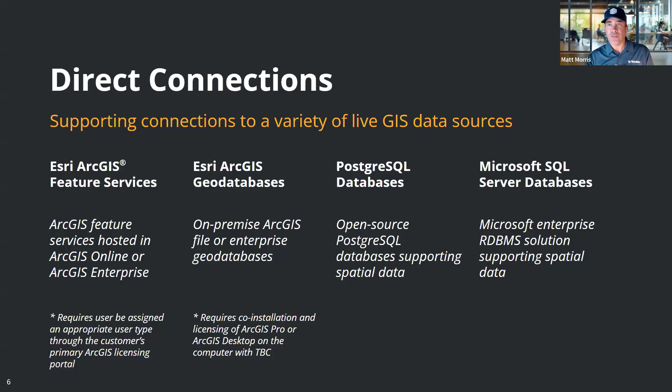Okay, it's no secret that a lot of people consider GIS a system of record, and a system of record that can enable and be shared with other enterprise systems in an organization. At the end of the day, GIS helps to bring together project and site-based data across space and time. A lot of times survey work is based on a site or a project, and what GIS is really good at is bringing that together from different time periods, from different spaces, being able to contextualize that with other spatial and non-spatial data. So you might have other environmental layers in your GIS, you might have political boundary layers, and all that can be contextualized in GIS along with your project-based survey data.

GIS enables use of a consistent authoritative schema for assets across survey and GIS workflows for optimal data quality. For example, in a water utility organization, you may want to say a hydrant has these properties that define a hydrant, right? And these rules. These properties are required, these properties are optional, these properties have to be one of these values, like a pick list. Well, I want to enforce that rule or that model for my asset across any workflow. So if I'm entering it in GIS, if I have someone doing an inspection out in the field, if I have someone as a surveyor out using Trimble Access, I want to use that same data model regardless of workflow.

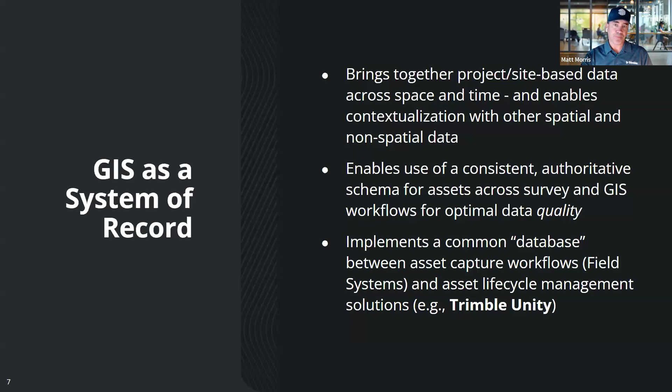Okay, getting into Esri ArcGIS specifically, which is in the title of the webinar. So I hope you came here expecting to hear something about Esri ArcGIS specifically. It's not the only GIS system of record, but arguably it's the biggest. TBC GIS supports the primary Esri ArcGIS data sources used by customers, geodatabases, and increasingly feature services.

For the last maybe 5+ years, it's become very clear in the Esri customer base that feature services are the preferred integration pattern for the modern Esri customer. They are supported at a core level across the ArcGIS platform. ArcGIS feature services can be hosted in either ArcGIS Online or ArcGIS Enterprise. So you may hear ArcGIS Enterprise referred to as Portal. Portal is the kind of cataloging discovery user experience on top of ArcGIS Enterprise.

And basically, if you're wondering, well, I'm not an Esri person, but what's the difference between ArcGIS Online and ArcGIS Enterprise? ArcGIS Online is a SaaS offering. You pay a subscription, or it's included in your Esri license, and you get access to it. It's hosted by Esri. ArcGIS Enterprise is most of that same functionality, but you host it yourself, either on-prem, in a private cloud environment, et cetera. So you bought the software, you license the software, and you're hosting it yourself.

Feature services expose GIS content to distributed clients through RESTful web services. This is a much more performant, scalable model than the old. Some of us who've been at Esri a long time used to connect to an ArcSDE database, right? An ArcSDE geodatabase. And if you try to do that over a VPN connection or over a wide area network, it was super slow because there was a lot of latency, very sensitive to latency. Well, feature services deal with all that because it's a RESTful web service. It's architected for that reason, scales much better, much more performant over all different sorts of network connections.

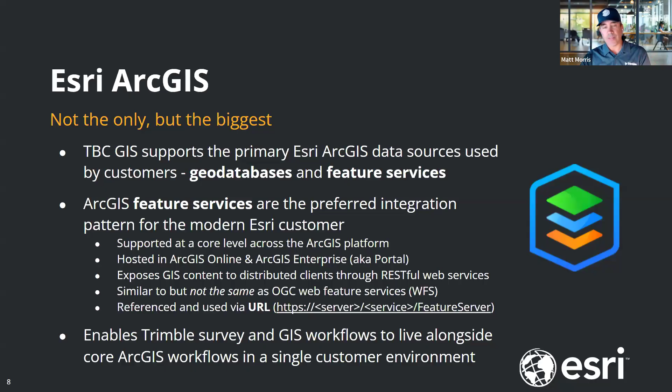Okay, let's talk in workflows. Before I talk about 3 specific workflows, I want to point out that all of these workflows in TBC GIS involve the same basic steps. On the GIS toolbar, you will use the GIS connection manager to create a connection to a GIS data set. And that's where you'll put in your feature service URL. To read existing GIS features into TBC, you will use the read features from GIS tool, right? So it's pretty self-explanatory. That pulls data in from GIS.

To write processed or extracted TBC features back into GIS, you use the write features to GIS tool. If you are writing features, maybe you've read features in, you've made changes, you want to write features back out, the existing features in GIS will be updated. We store those relationships. When you pull features in, we relate the feature in TBC to that ArcGIS feature, such that when you edit it and want to write the changes back out, we will update that feature in GIS and we will not duplicate it. Lastly, if at this phase of the work you want to create a new feature code library from GIS, you will use the Get GIS schema tool.

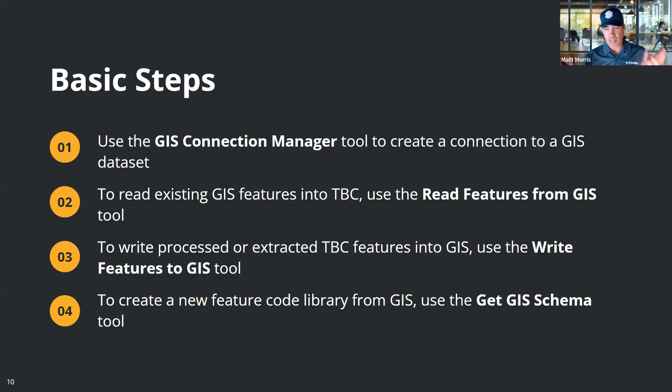And you'll see examples of this very shortly. Okay, three example workflows. I'm going to run through these demos first and then provide some more details afterwards.

I want to show you the end result, and then we can talk about how I got there. In each of these cases, I recorded these videos yesterday using the released version of TBC 2025.10. Most of this functionality, except for the last one, has been there for a couple of years, so it's nothing groundbreakingly new. I'm using the latest version of ArcGIS Pro, and services on the latest version of ArcGIS Online.

First example workflow is water utility GIS data, bringing it into TBC for design context. As a water utility, I have all of my layers in GIS, and I want to bring some of those infrastructure layers into TBC for context during a road design or other project, so I know what I'm starting with in a certain area. I may also want to bring those features in and send them out to the field in a job in Trimble Access because I need them staked where there's buried infrastructure. That's the use case for bringing water utility GIS data into TBC.

The second demo is a topo survey from TBC that I want to send to GIS for storing all my as-built. After I've completed building something, I'll go out and do a topo survey, collect that as-built, and send it into GIS, which I use to pull together all of my different sites and project work. This data was collected in Trimble Access, feature code processed, or baseline processed in TBC, and I'm going to send that into GIS as an as-built repository.

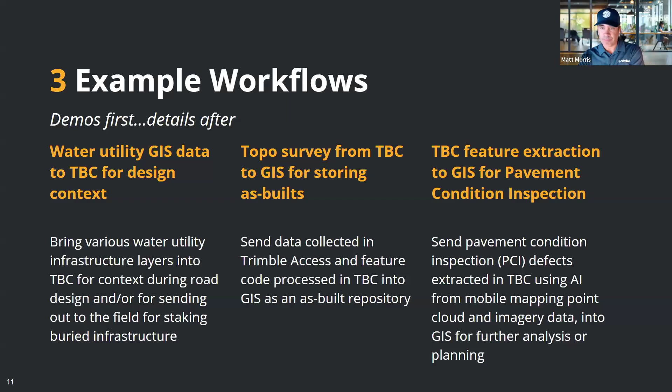Okay, first one, water utility data. Let's do this. Okay, hope that you can see my screen here.

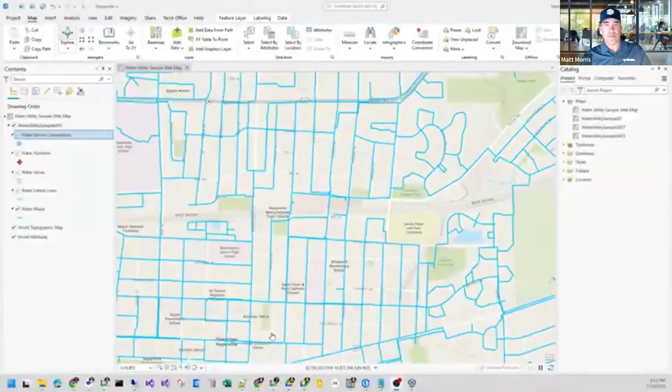So here I have my water utility data in ArcGIS Pro. This is something very common for a water utility, and I'm going to zoom in and see that this is the area I'm interested in. As I zoom in, layers turn on, I see some water mains, laterals, hydrants, shutoff valves, meters, service lines. This is the project area. I'm going to be doing some road work in this area, and I want to bring all this into TBC.

The first thing I'm going to do is go in and discover that feature service URL. In this case, I'm pulling this out of a property of the layer in ArcGIS Pro. There's my URL. I'm also looking at my coordinate system, verifying that this is Illinois State Plane NAD 83(2011), so I have the EPSG code 6455.

So I'm going to come over into TBC, and we're going to start a new project from scratch. I'm going to create that new project and do two things: first, define the coordinate system for the project, which is why I checked that in GIS. So here I'll search for that EPSG code 6455. I'll talk about coordinate systems a little bit more after these workflow demos.

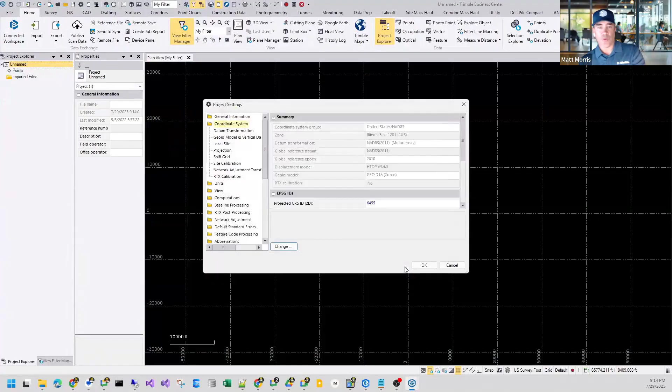The other thing I'm going to do is set my feature code library. Now, what I have done already is create a feature code library for this GIS data, and I'll talk specifically about how I did this. For this demo, you'll see that I've already created that. So now I have a new project.

I have my coordinate system and my feature code library already created and symbolized. Now I'm going to zoom into the area where I want to bring that data in, and use the functionality in TBC to limit what I bring in. So I'll go specifically to the area of Naperville, Illinois, where my utility is, and start using the GIS module to get that data in.

I did specify geoid 18, maybe I didn't show it, but I clicked through that relatively quickly. So this is Illinois State Plane NAD 83-2011, using geoid 18 for orthometric heights.

So here's that same area. I've turned on my base map from Trimble Maps just to see that same context, to know where I'm looking. So I'm going to go to the GIS connection, pick Esri service, and paste in my URL.

And here, as I mentioned, I'm prompted for my ArcGIS authentication. My login gives me the ability, if I knew how to type my password, to read and write to these data sources. So I'm going to go ahead and connect to that.

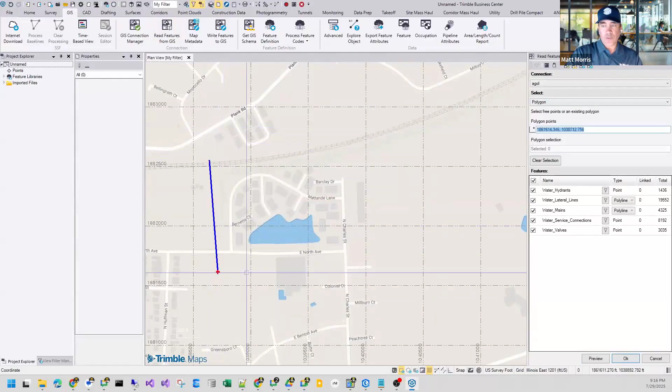So here I see a summary of the data available to me, and that's a lot of features in that total column. But what I'm going to do is only bring in the features within this polygon, because that's all I'm interested in. So I'll click OK.

This is going to apply that spatial filter when reading data from these feature services across those 5 layers: hydrants, lateral lines, mains, service connections, and valves. If I tried reading in the whole thing, TBC feature services have a limit on what you can read in one shot, so I wouldn't be able to bring all that in one go. But in this case, since I'm only interested in a specific area, it works pretty well.

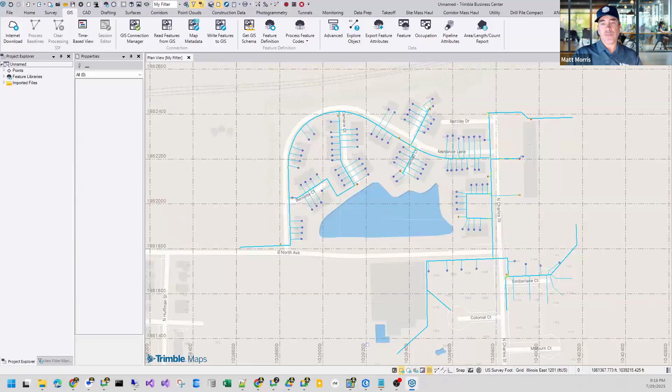So here I have 421 features that came in. Like I said, I've already symbolized them through my feature code library to look something like they do in GIS. Symbology is something that doesn't come out of the box—you're kind of on your own with symbology to try to make GIS and more CAD style symbology match.

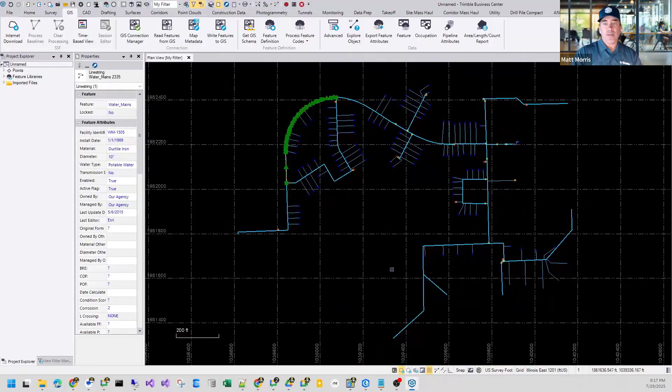And here I see not only my geometries, but all of my attribution as it existed in GIS. So now I have this available to me contextually for the work I'm going to do on this design project. And like I said, I can send it out to the field in an Access job if I want to go have something staked out in the field.

Okay, workflow 2. In this case, we talked about a topographical survey that I did, say, in Trimble Access. I went out and collected a bunch of features with the feature code library that I authored in Trimble, and I want to then send that into GIS. As I complete an as-built survey of a site, I want to be able to send that into GIS, and then I want my GIS users to have access to that data for all of the sites that I've surveyed. So let's go ahead and start there.

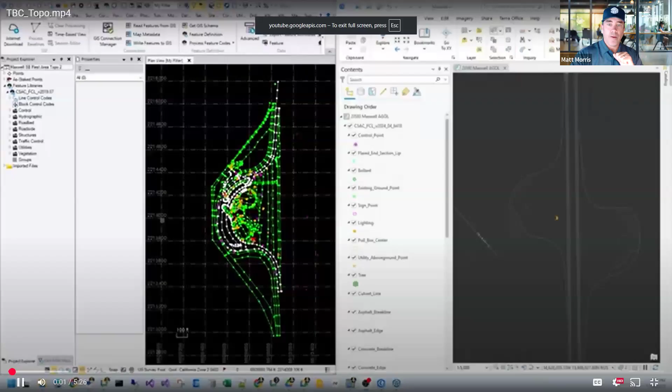So what you see here, it's a little blurry at first, but it'll click in. I have on the left a project in TBC, and on the right an empty screen in ArcGIS Pro, which is a feature service. I'm just showing that, hey, no data exists yet for this location. This happens to be a rest stop, and I'm going to do the same thing. This ArcGIS Pro project is already referencing that feature service.

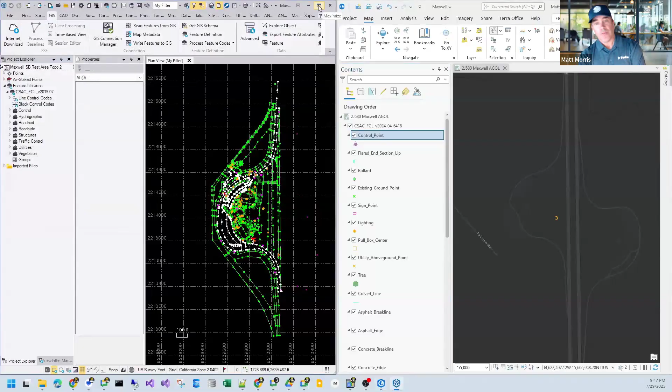So I'm going to, same as before, get that URL because that's what I need in TBC. I'm also going to validate the coordinate system—this is another NAD 83-2011 state plane, California Zone 2 up in Northern California. So here I have a fairly traditional TBC project, with a fairly comprehensive feature code library authored in Trimble tools using Feature Definition Manager. And I can click on things.

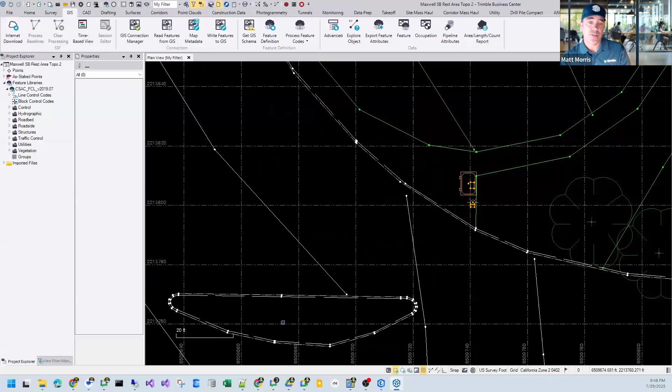That's a tree. I see some attributes and properties of the tree there on the left in the TBC properties window. I have a fairly traditional topographic survey with control points. Again, not heavy attribution, but attribution nonetheless, and the ability to attach photos and files as media elements based on my feature code library.

So remember those steps. First step, create a new connection. I'll give it a name, pick the data source type, Esri service, and connect. I'll paste in that URL that I discovered earlier through ArcGIS Pro, and again I'm prompted for my login. I should mention that in this particular demo, I'm getting that feature service URL out of ArcGIS Pro.

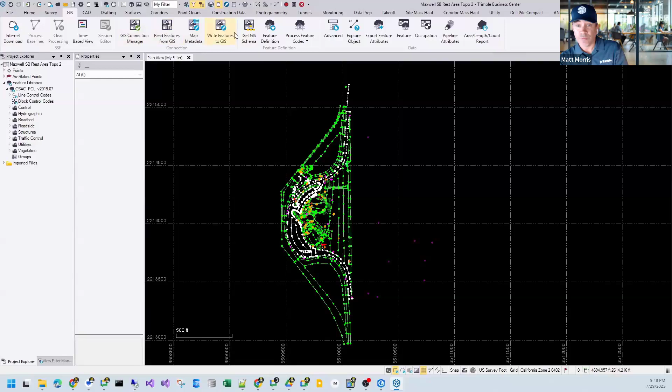In a later demo, I'll show you I can also get that through an ArcGIS Online web environment or through the web user interface. It doesn't have to be ArcGIS Pro.

So here, when I connect, now what I'm doing is I'm going to write features to GIS. You see here on the right, these are all of the layers in my GIS connection that I can write data to, and it's already been mapped to my feature code library. So all I'm doing here is selecting all the features, and I see the counts in that new column saying these are all new features that I'm going to write into this GIS data source.

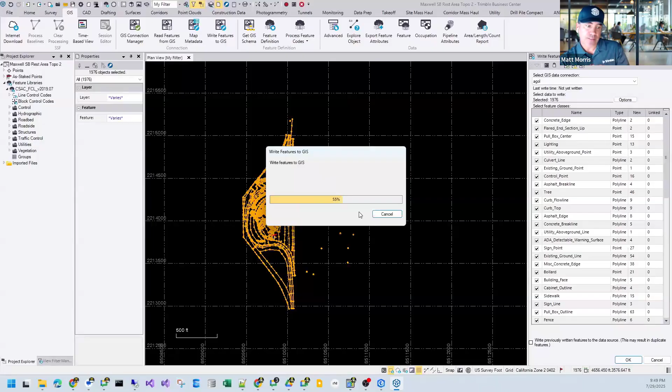Now, I want to point out that the number you see at the top, that selected data to write, says 1976. That includes all of the individual points that make up lines, and that is not data that will get sent over to GIS. From a line and polygon standpoint, what ends up in GIS is the finished geometry. Although what we retain in TBC are those constructions, all those individual points that make up the line, make up the polygon, what gets sent to GIS are points and the finished lines and finished polygons.

So you'll see in this report when it's done, that resulted in 374 features being sent to GIS.

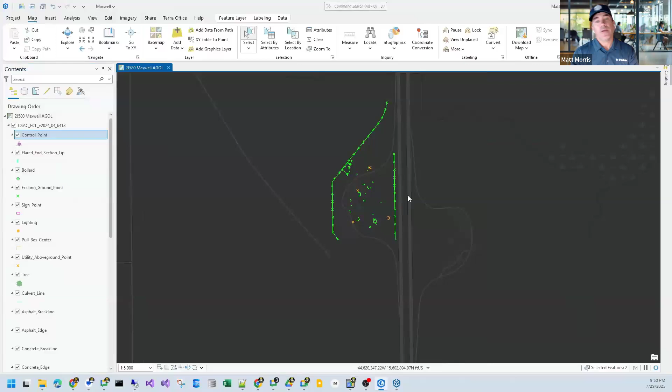So now let's flip over to ArcGIS Pro, back where it's referencing that feature service. I'm going to refresh it, and I'll see that there is that data now in ArcGIS Pro. I'm using ArcGIS Pro to look at a feature service, and I've already defined my symbology to match roughly what exists in TBC. And I can click on a feature and view properties.

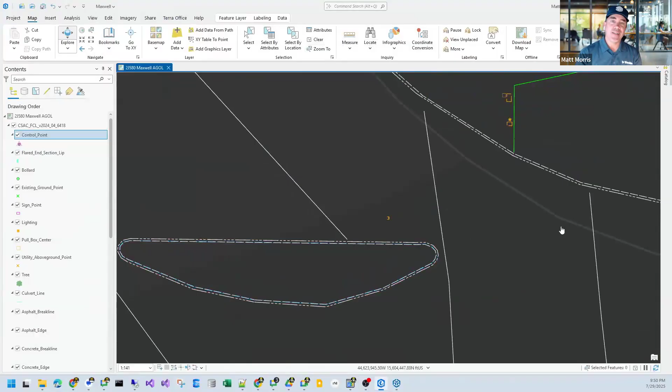In this case, I happen to select a feature instead, so I'm going to get a property here of a base layer that is irrelevant - district tiger lines is completely separate. But when I clear that selection and then click on, for example, one of the trees I clicked on earlier, there's the properties of that tree.

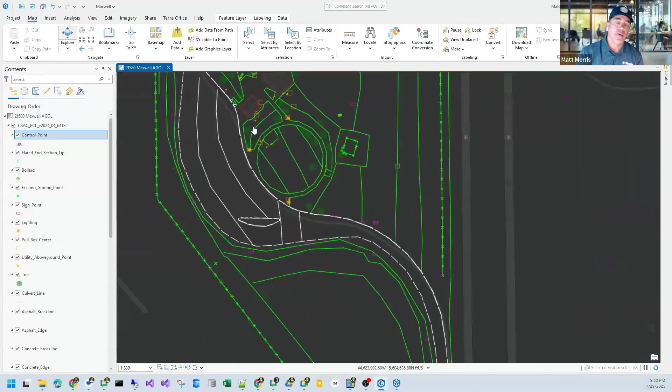And this is now a two-way connection to this data. If I edit an attribute of this in GIS, I can read those changes back in TBC. If someone put in that tree information wrong, or someone in GIS wants to provide additional attribution, I can read that back in TBC to my existing project and the existing feature. Here's a sign, traffic control, regulatory sign made out of metal. So there's my data sitting in that feature service.

Well, what does that look like through a web browser, right? Because a lot of GIS users, if they're using ArcGIS, are going to be accessing this content through a web browser. So here I'm logged into ArcGIS Online. I'm looking at my content, and I want to go down and only look at web maps. A web map basically references layers, references feature services.

So here I have that same feature service that I was using in ArcGIS Pro. Now I'm referencing it in a pure web-based web map. And here I can contextualize it with my district boundaries, with my state plane zone boundaries. This could be a project index where I could say this is my starting point for looking at my survey data across a bunch of different projects.

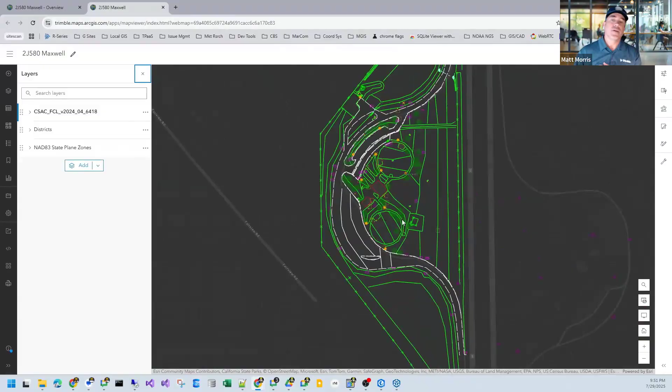So sure enough, I can zoom in, see the exact same content rendered the same way cartographically, and I can still click on things and get a pop-up to say what that feature is. Same functionality, I'm just showing it here in the browser. And this is kind of the power of GIS, being able to spread this, provide access to this data across a lot of different clients - mobile clients, web clients, desktop clients, etc.

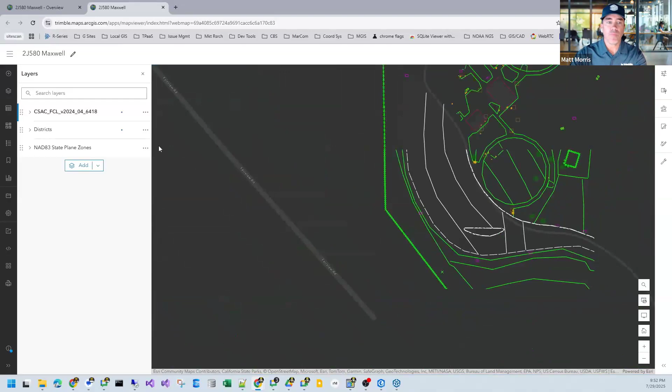You also have the ability, obviously, to set bookmarks, things like that. So I can go back to that context of my districts and zones.

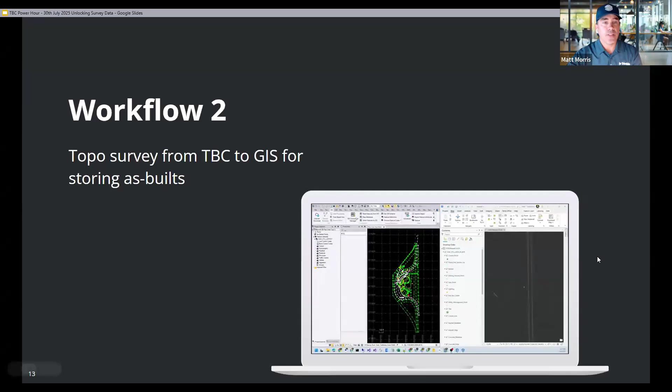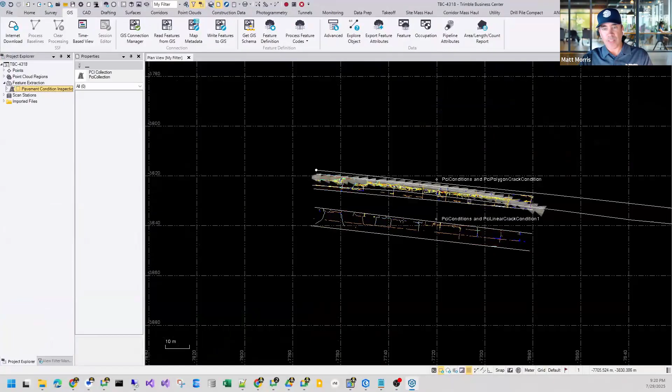The constraint is you have to have a known schema in the GIS that matches this PCI. And there are some ways you can manage that if there are some differences in naming. But I can click on these. I've extracted alligator cracking. Here's one that's rutting, high severity. So all this comes out of that pavement condition inspection work in TBC.

So now I have this data, and I want to bring this data into GIS because I want to contextualize it with maybe some other layers: is this near open space? Is this near other environmental concerns? Is there anything around the work planning I need to be aware of for repairing these defects?

So I'm going to do this through a web browser exclusively. I'm going to look for my layers that I've already created to store this data. So here I'm looking for feature layers, using the filtering tools in the environment to find the layer I'm looking for. Here's the layer I've created with the appropriate schema, and I will discover the URL from here. There is that feature service URL that I need in TBC.

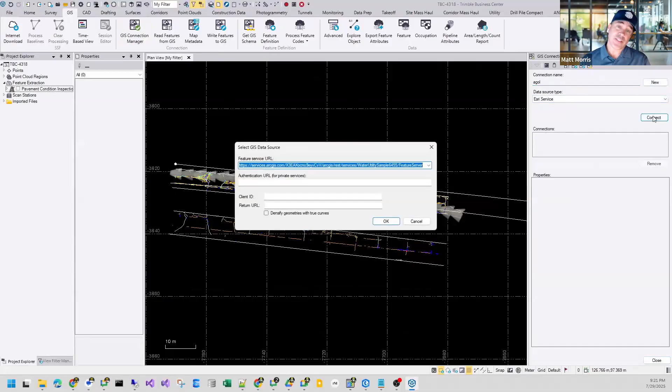So let's come back to TBC. We know what we need to connect to. We know where we want to send this data. Create a new connection. ArcGIS Online, call it AGOL, call it anything you want. I should point out that a TBC project can have multiple connections. If you want to bring in other layers from other GIS data sources, you can do that.

Now, what's interesting here is when I connect to this data source, it's saying, hey, I can't resolve these two coordinate system differences. What do you want me to do? And you get the choices of change the project coordinate system to match GIS, keep them but perform a transformation between the two, or consider them to be the same. You also get specific control over what type of elevations are coming in from the GIS, orthometric or ellipsoidal.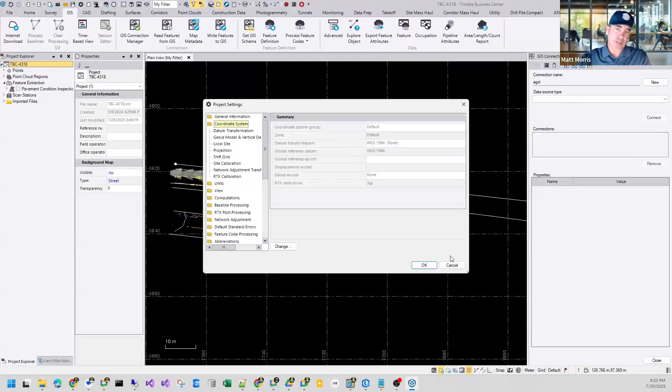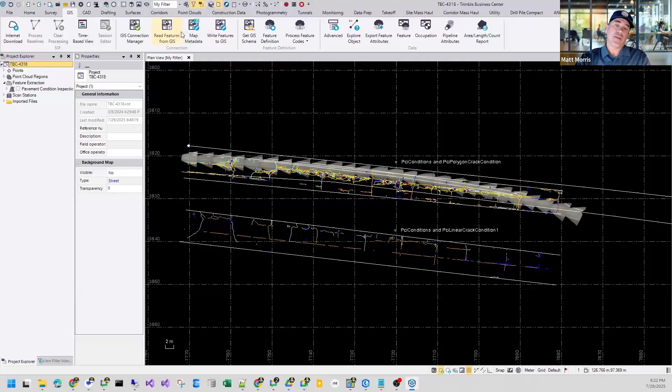So let's go back. I'm going to cancel that. Let's go look at this project and see why this is the case. Well, sure enough, here's what it is. This project in TBC was created in WGS 84 for whatever reason. So what we need to do is select that middle radio button that says transform grid coordinates when reading and writing features to and from GIS, to navigate between a WGS 84 project in TBC and a zone or projected coordinate system in GIS.

So now I have my connection. I'm going to select all the features that I want, and I see them selected here in those 5 layers. And I use write features to GIS. Selected all the features, and I'm going to send those over. So now all that pavement condition data that was extracted, the condition scores, all those individual defects have been sent to GIS.

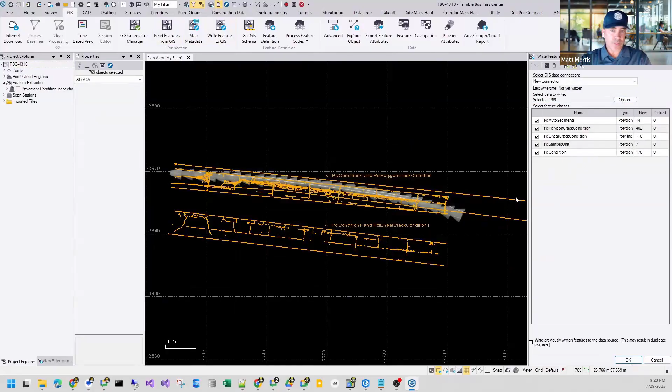I'm not showing here that after every write operation, we give you the ability to look at a report. So you can see successes, failures, etc., to give some more information about what just happened and if it worked the way you expected it to.

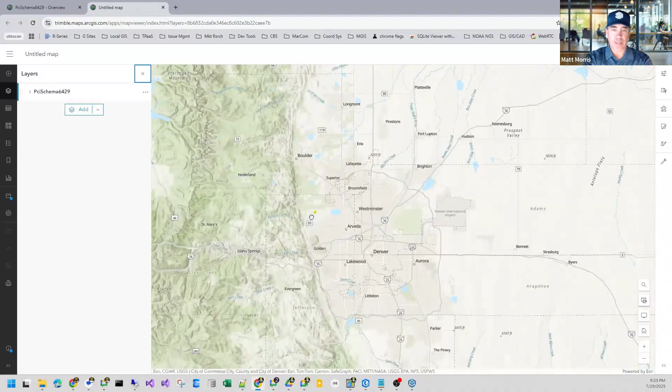So I'm going to go back to my ArcGIS Online user experience, and I'm going to add that layer to a new map. What I've done here is I have just opened up that layer in a new map. This is just the default map, and I can zoom in and see that feature service data layered on a default base map.

And so, okay, I'm part of the way there now. But what I want to do is, first of all, look and make sure that I have all my, so what I did ahead of time is I set up all the symbology here to match TBC.

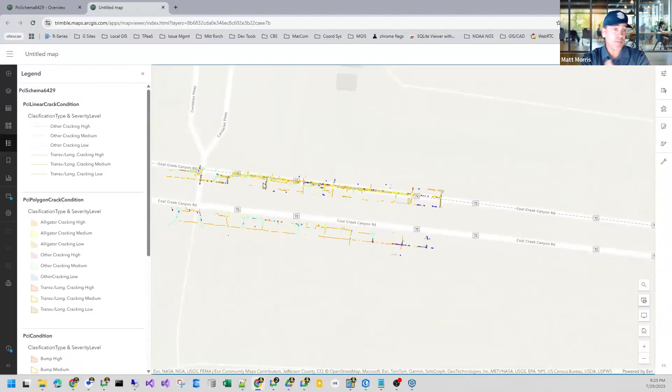Again, symbology is kind of manual, you've got to do that yourself. It's not included, not really supported. We don't set symbology automatically. I'm going to change the background map here to maybe make it easier to visualize over an aerial photo.

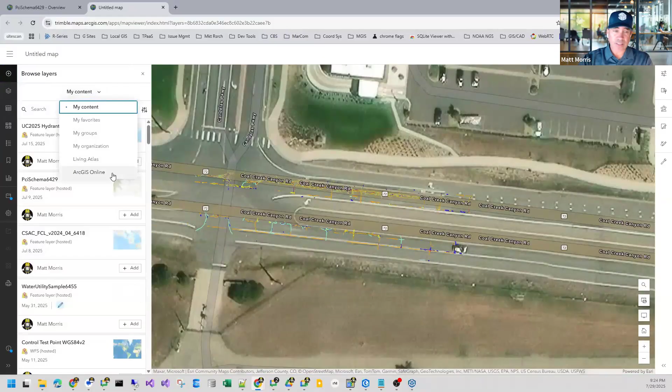And what I talked about with GIS is I want to contextualize this data. So I know that there are layers available in ArcGIS Online that are public, or in Esri's Living Atlas, that might help me contextualize this data. So the first thing I'm going to do is look for a Jefferson County open space layer, what's defined as open space land, so I can add that layer.

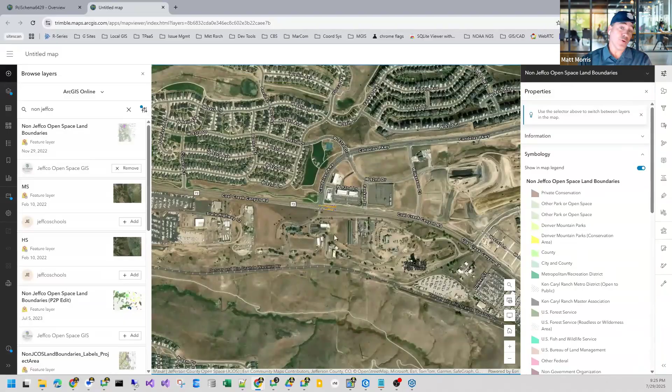So I know I have open space designated land around here. Let's add a layer and see if this project site is anywhere near that. And I say, okay, it's not immediately adjacent, but it is within range; there are open spaces around it, which might inform how I need to perform this from an environmental sensitivity standpoint.

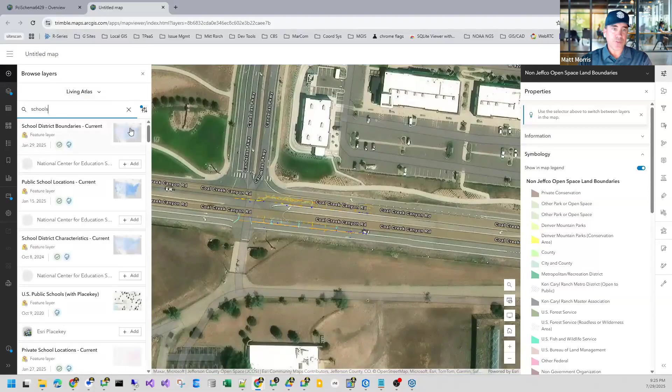Additionally, in this aerial photo I see things that look like schools. When I'm doing work in this area, do I need to be concerned about schools? So here I'm going to go over to the Living Atlas and just search for schools. You saw earlier that I had already picked a filter for results in the map area. So I just added a layer for public schools, and sure enough, there is a school here.

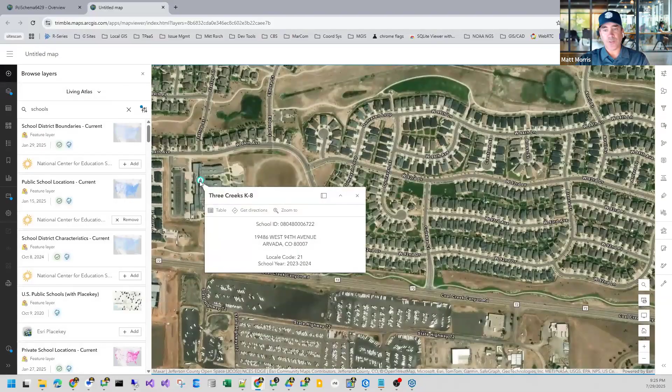And I can click on it and get more information about it and see that it is a K-8 school. Maybe this will inform when I can do this work, because K-8 schools typically are out during the summer, so less traffic on the road, easier to do repairs on the road.

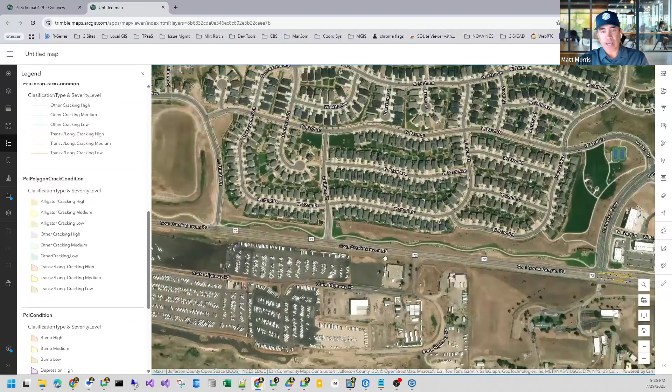At any time, I can go look at map symbology and see all these layers that I've added, not just my pavement condition inspection that I pushed from TBC with all of its detail, but also all these other layers that I added for context. If I want to keep changing base maps, there are a lot of other base map options available in the context of GIS to help me visualize this data.

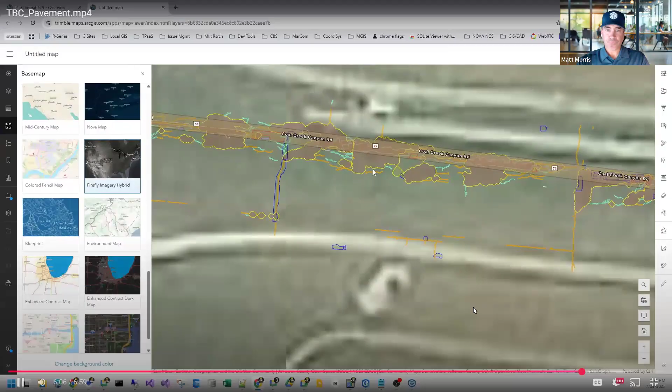Okay, so those are the 3 workflows. And in those workflows, you see that I already had some things set up, right? Some of that is just to make sure the demos flow clearly. But now I want to talk specifically about those key configuration items and how you get to those workflows. There are 2 big things: schema and coordinate systems. The best practice is to make sure that these match between TBC and GIS.

On the TBC side, a schema is defined through a feature library that controls attribution and symbology for each feature type. In TBC, a feature is a point, line, or polygon that has been assigned a feature type from a feature library. GIS is all about schemas, right? Each layer defines the schema: the types of attributes, the data types, the rules, whether it's required, min and max values, choice lists, things like that.

The GIS module translates between a GIS schema and a TBC schema. But what it doesn't allow you to do is map between disparate schemas, right? So you need to have those set to match. And I'll talk about that on the next slide.

Additionally, coordinate systems. You saw me do this in the demos where I was validating that coordinate systems were the same. In TBC, the project coordinate system defines the spatial reference and includes a horizontal component and a vertical component, the horizontal being zone, datum, and transformation, the vertical being the geoid. Esri also has its coordinate system definition. You do have some ability to navigate between differences in coordinate systems, as we saw in that last demo, but where possible, you want these to be the same.

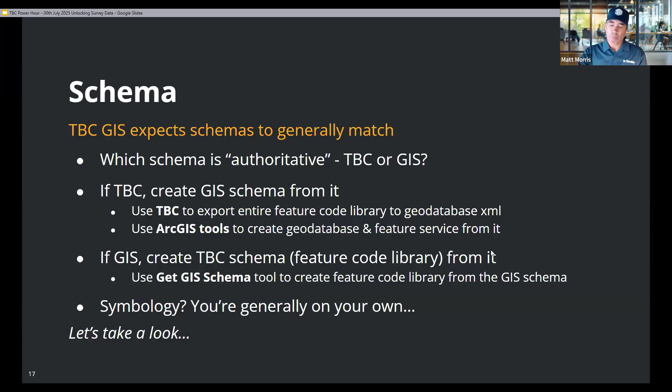So in this video, I showed two things. The first thing I'm going to start with is I have an authoritative schema in TBC. For this demo, I'm actually using the global features feature code library that ships with TBC. So I've created a simple project in the coordinate system 6424, which is my local California state plane zone.

And I see that here are my feature types in that global features FXL that ships with TBC. I can use this in Trimble Access, whatever. And I can go in here, I can look at it and say, yes, this is my authoritative schema. I've defined it using Trimble tools, and I want to bring that schema into GIS such that I can connect to it. And now I can send data from TBC to GIS and the schemas match.

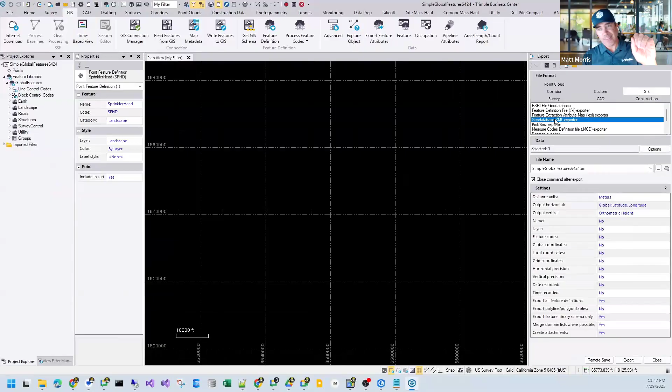So how do I do that? Well, I go over to the traditional export, right? We talked about there's still use cases for this. I will pick the GIS format, I'll pick the geodatabase XML exporter, and then I'll specify these specific options at the bottom. Export all feature definitions, export feature library schema only, merge domain lists where possible, and create attachments.

Now, what create attachments is, is if you have feature types with attributes that let you store files. So that could be a file or photo attribute type. What this means is that when we export this geodatabase XML file, which is a definition of an ArcGIS schema, we will enable those layers for attachments because we want you to be able to store those files that maybe you've associated with features or captured in the field in Access or added to the features in TBC. We want to be able to pull those files into the GIS as well, pictures, PDFs, etc.

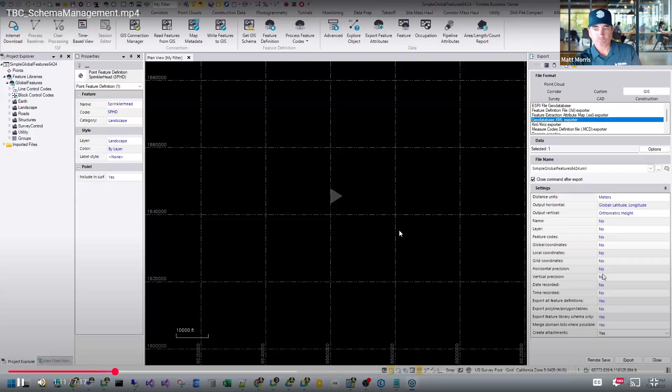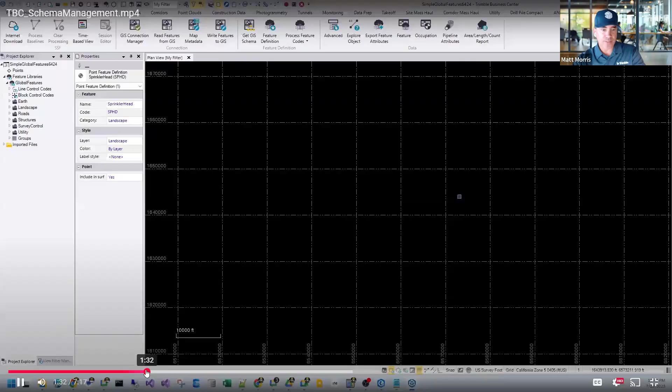Okay, so now I'm going to export this and it's going to go to this geodatabase XML file. So this functionality is not new. What is new here in the last couple of versions is the ability to export all feature definitions and no data, right? I just want the feature definitions. I don't want the data. I just want the schema. Okay, so that's what I just did. I exported just that schema. I didn't want any data, just a schema, and I want every layer in my feature code library.

Now I'm going to flip over to ArcGIS, and this is a default empty ArcGIS Pro project. I'm going to create a new file geodatabase, just an empty geodatabase. This is the process you need to use, and I'm going to call it global features WGS84. The reason I'm calling it WGS84 will be clear to you in a minute. So this is just an empty file geodatabase, and I'm going to import that geodatabase XML file that I just exported in TBC.

So I picked that one. There's that XML file, again, based on that Trimble global feature code library. And I see that here's all the layers, the feature classes, and the attachment classes. The reason the item count jumped here to 225 is because when you enable feature classes for attachments, it adds multiple other data structures in the geodatabase. That's why it's 225 instead of the 112 that we saw over in TBC when we exported that feature code library.

Okay, so what this is doing is this is building out the geodatabase schema. This is the process you need to use to do it. So now I have an empty geodatabase with all that data. Now, when I go look at the properties of these layers, I will see that they are WGS84. But I don't want my GIS data set up in WGS84. I want it set up in a local coordinate system, a projected coordinate system.

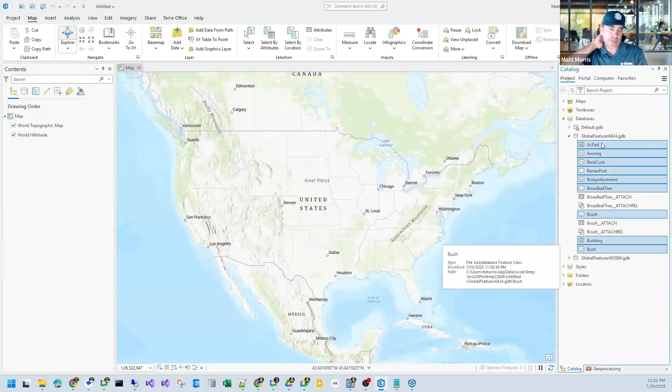And we're talking about feature services. So I want to publish this to a feature service such that I then can connect to it from TBC. Now, if all I cared about was the geodatabase, I already have it. But it is the first step. It's a prerequisite towards creating a feature service in a specific coordinate system in this workflow.

So I've added those layers to a new map. I'm going to go in here and see that my map projected correctly to my local state plane zone. I see the orientation. I will check it just to make sure that my coordinate systems are set correctly in my map. Yes, there's my XY and there's my transformation. The reason the transformation is there is for the base map. Esri base maps are always WGS84 Web Mercator.

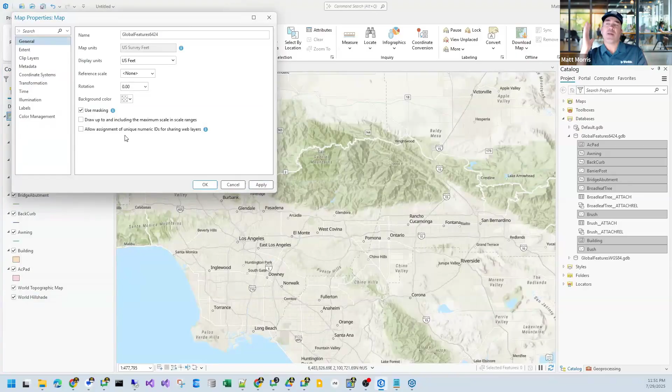So now I'm going to give this map a name. This name will form the basis for my feature service name. So this is all Esri functionality, right? But I'm just wanting to show you the end-to-end workflow from how to get TBC schema to GIS schema, and GIS schema back usable in TBC.

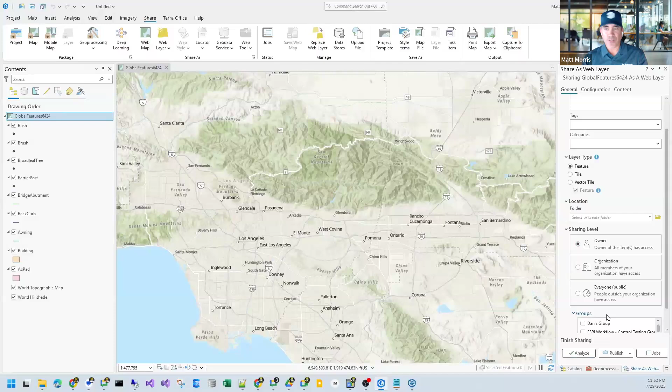So what I'm doing now is I'm using ArcGIS Pro's sharing functionality to share this map as a feature service. So this is what this looks like. It's called sharing it as a web layer. Layer type is feature. This is the workflow I would use to do it. So I started with a geodatabase XML, brought that into a geodatabase, published it as a feature service that then I can use in TBC.

So let's go back, flip gears. What if my Esri schema, my ArcGIS schema, is authoritative? So let's go back to this example earlier of this water utility. This was a water utility data model authored in Esri originally, and I want to create a feature code library from this. You saw I already had this. When I did this demo, I already had a feature code library. So how did I create that feature code library?

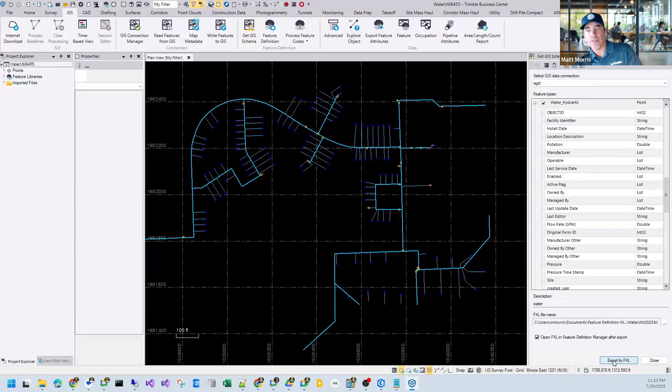Well, let's go back to this project where I have a connection to this feature service. Here, I'm going to use the Get GIS Schema tool. And here I see it's already gone in and said, here's the schema. You have these 5 layers. Here's all the attributes in those layers. Here's the data types, whether they're list, double, date time, et cetera, their default values. So it's going to read all of that Esri schema that is directly translatable to a feature code library. And I'm going to create a new feature code library from it.

And here's the result of that. I have the 5 layers, 3 point layers, 2 line layers, and I can look at hydrants here and see those attributes, see that they've already been converted to the right data type. If it's a pick list, I will see those lists. So again, this was all defined on the Esri side.

Now what I'm doing is I'm creating a Trimble representation of that schema that matches. So now I can use this, I can go survey this data and know that it will match my GIS schema. The other thing I did is I defined symbology, right?

When you create a default feature code library using Get GIS Schema, you're just going to get default symbology. So I did go in using Feature Definition Manager, and I did define symbology to look more like the GIS. Make the pipes blue, make the hydrants red, make the valves with the circle with a cross symbol, etc. That was manual work I had to do at the feature code library level.

Okay. Coordinate systems is a topic that could take up a whole Power Hour, as we know, especially anyone who knows me knows this is probably something I spend 15–20% of my time in around coordinate systems, and specifically around coordinate system interoperability. So I'm not going to dive into a lot here other than to say Trimble and Esri ArcGIS products model coordinate systems differently.

And the entries that you see in TBC and Esri may look more different than they actually are. The models are different, the nomenclature is different. If possible, try to use standard, quote unquote, EPSG coordinate systems, and the codes, so those WKIDs, which you saw me use, I did 6424, I think I did 6455, are a generally safe way to determine coordinate system matches between Trimble and Esri, except when they're not, right?

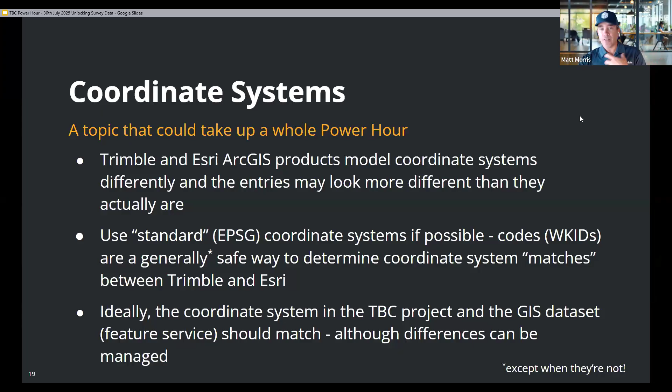But we've been really making a concerted effort that when we say in Trimble, if it's aliased to EPSG 6424, then you are going to get that coordinate system, and it'll be the same as Esri's 6424, as EPSG 6424, etc. So that's what we're really focused on at an interoperability level, is making it easier for you to determine those coordinate system matches.

Okay, a few other bits and bobs. I'm running out of time here, but a few other things I just want to mention. Metadata. You saw in the toolbar, the Map Metadata tool can be used to map some GNSS metadata, and that's typically from RTK vectors or total station observations, to GIS attributes. Metadata mapping between that property in TBC and the GIS attribute is generally assigned per layer. And those attributes have to exist before you connect to the source. So you would have to create those attributes in the GIS before you start using that data source in TBC.

Project info. This is something that's new at TBC 2025.10. In the TBC project properties, you can define things like reference number, user name, things like that. Those now are transferable into GIS attributes. So let's say you wanted in all of your layers to put project reference number or project ID, you can configure it to automatically transfer that property from the TBC project into GIS.

Any data that you write from that project will be stamped. That attribute will be populated with that reference number from the TBC project properties, in addition to the user, things like that. There's a handful of properties that can be persisted into the GIS. Media files transfer as attachments. I mentioned that a little bit earlier, if you have photos, documents, anything that's attached to a feature, those get transferred as well into feature services and geodatabases.

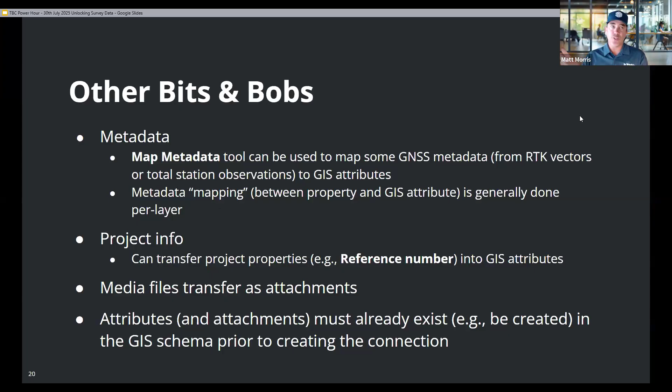Key caveat here, attributes and attachments must already exist in the GIS side, in the schema, before you create the connection, right? There's no functionality in TBC to create that new GIS schema while you're doing this. Okay, summary. Most important things. Understand the workflows that are possible and what you want to use. We talked about three. You could certainly figure out others, right?

There are more round-tripping workflows that I didn't really cover, if you want to have edits made and applied, things like that. Decide if your TBC or GIS schema is authoritative and make the other one match, right? It doesn't really do well with disparate schemas.

We want schemas the same on both sides. Use standard coordinate systems if possible. Lastly, expect us to continue to improve Trimble GIS. This is an active area of development that myself and other product managers are involved in, as well as engineering teams.

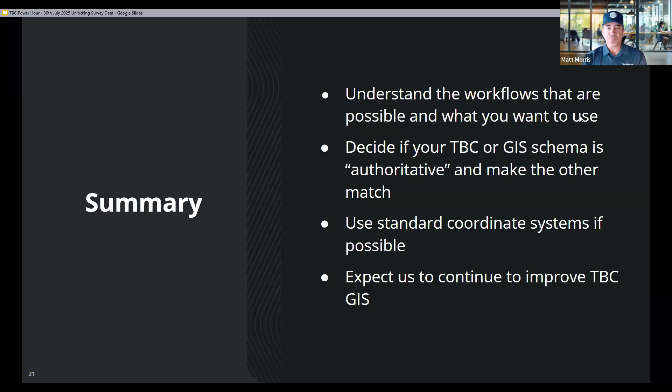Okay, Q&A. Thanks, Matt. I see we got a few questions that popped up. The first one is, does the current Trimble GIS module and connection support advanced Esri SQL functionality like editor tracking, COGO, etc.?

So I'll separate this. Editor tracking, yes. Editor tracking is functionality in ArcGIS that allows you to automatically add standard fields to track who was the last person to edit, who created it, when it was edited, when it was created, etc. If you enable editor tracking on these feature services, TBC would see that and say these are Esri managed fields, I'm not going to touch those, and they would get populated when that data is written to the feature service. They're not going to get persisted into the feature code library, which is what you'd want. You'd want that managed on the Esri side, which it is. So editor tracking, yes.

Utility network, no, not yet. Right now you cannot edit data in a layer that participates in the utility network, so that's not there. COGO is more of a user experience tool in Esri; there's not a lot at the data model level around COGO.

We do support true curves, which is kind of related. So if your feature service is set to support true curves, we will pass true curves from TBC into the feature service. The other thing is, this covers points, lines, and polygons. What's not here in the GIS module is surfaces - surfaces and alignments are not there. You could bring in a polyline from GIS into TBC as an alignment. I didn't show that, but there's a pick list - when you connect to a line layer, you can choose whether you want to bring it in as a line or an alignment. So that covers some of that.